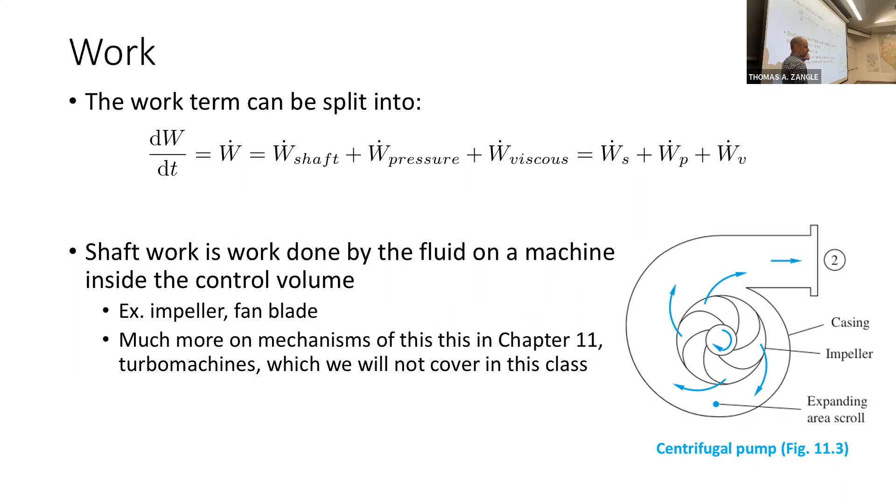We're kind of ignoring the details of exactly what its flow looks like. We're just saying what is the rate of energy change due to that piece of equipment. Makes sense? So the second term here is the pressure work term. And I really just want you to understand where this comes from.

So if you remember back to like a physics 1 type thing, work is force times velocity, right? That holds here as well. But if we had a cart that I'm moving along the floor of the lecture hall, or I take my water bottle again and I slide it along this desk, right? There's a frictional force that I'm opposing as I'm pushing it here. And if I push at a constant velocity, I am doing work against that force. And the amount of work that I'm doing is the force that I'm applying times the velocity with which it's moving, right? That's the work.

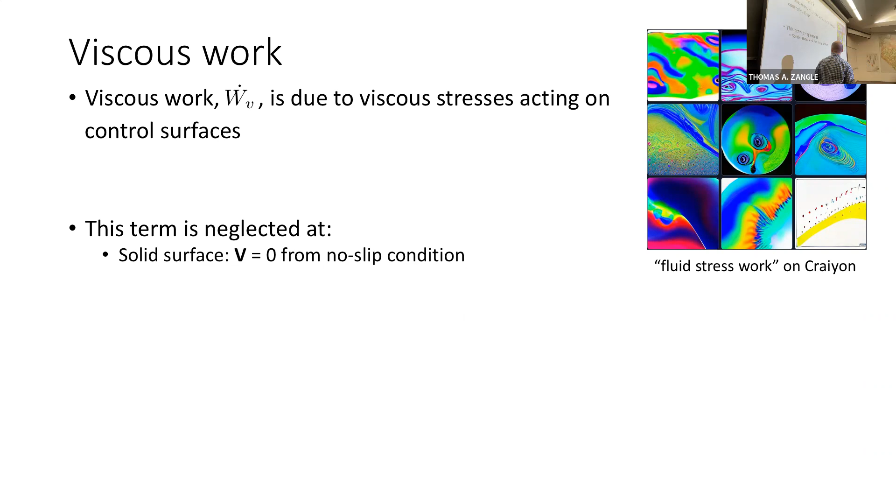So actually, at any solid surface, the velocity of the fluid is equal to the velocity of the solid surface, meaning that at the surface itself, there will be no net amount of work being done by the viscous stresses on the surface. Again, work would be like the force times velocity. And since the velocity of the fluid is equal to the velocity of the surface, the relative velocity is 0. There's no work being done by viscous stresses at the solid surface itself. So at the solid surface, V is equal to 0.

At the surface of a machine, as we mentioned, any viscous drag effects are going to be included in that shaft work term. So if we have some kind of a turbine or something that we're spinning with a fluid, we're not going to say that we have a shaft work term plus the viscous work that's being done within that piece of equipment. We're just going to say that all of that is lumped into the net shaft work term. So we're going to ignore the viscous work term there.

If we have an inlet or outlet normal to the flow, so again, this is another reason to choose your control surfaces normal to the flow, then the normal components of the viscous stress are typically negligible, and so we're not going to have any viscous work being done at inlets or outlets that are normal to the flow. So basically, the only time that this term is important is if our control volume boundaries are on streamlines within the fluid. So what I mean is that if this represents some flow within a fluid, and our control volume boundaries were entirely contained within the fluid and following along with the flow.

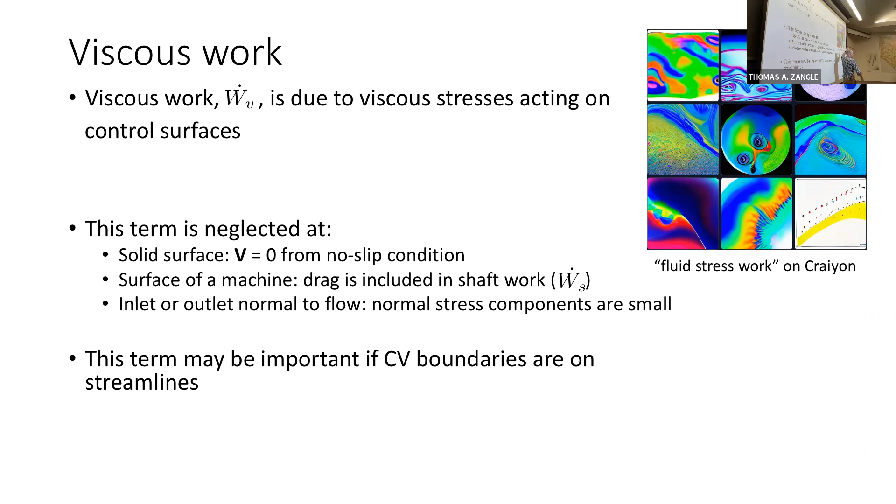Right, so not at a solid surface, not normal to an inlet or outlet, following along with the flow, then we often are going to have to include these viscous stress terms. But most of the time, if we draw our control volume correctly, we can ignore them, and we're going to assume for now they're not important in most cases.

So we will be lumping this into a viscous work term, and we're going to discuss how to calculate this later. So, for example, when we discuss pipe flow, we're going to have to include viscous work. We're going to have to include friction work. But for the most part, in our chapter 3 type problems, we're going to be generally ignoring this term, okay? Until we learn how to calculate it in our chapter on internal flows.

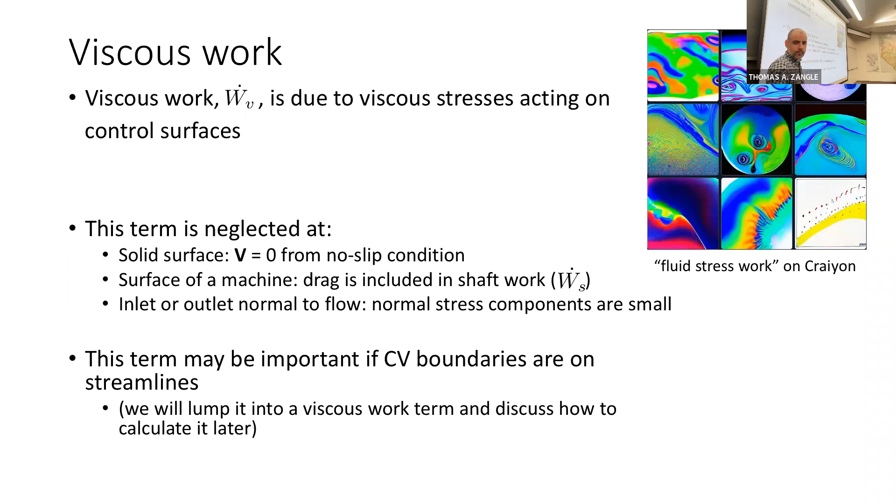All right, so if we put this all together, we're going to say that dE/dt, E dot within the fluid, is Q dot minus W dot. It's going to be comprised of those terms that we just discussed. Remember, this is equal to, based on Reynolds transport theorem, the rate of change of energy within the control volume, plus the flux through the control surfaces, which we can write out this way in terms of the unit normal, that n, right? So V dot n. So the flux across the control surface.

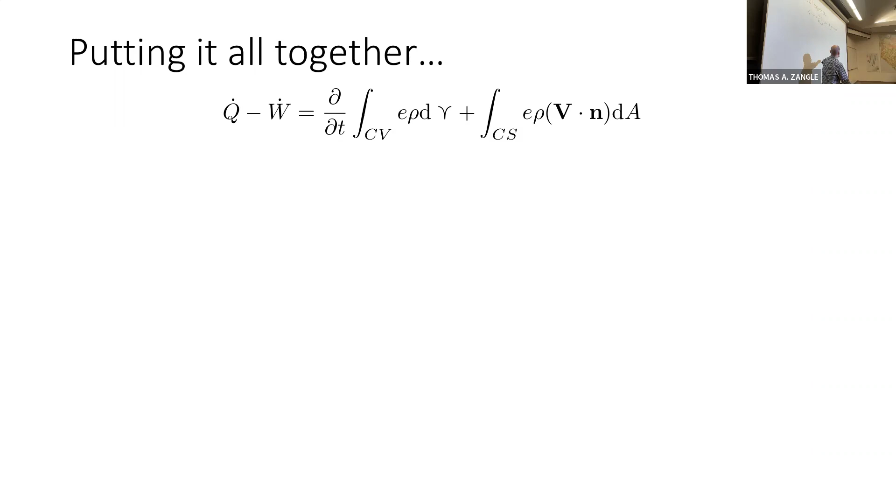And we have for the work term, we have shaft work plus, this is what the pressure work turned into, plus the viscous work. So a lot of times in chapter 3 we're going to be ignoring it, but it's going to be important when we start talking about pipe flow. And now if we plug this in,

actually before we plug this in, I'm going to take you back one step here. Before we plug this in, I want you to notice that this looks a lot like the flux through control surface term, right? What's going on inside this integral here is very similar to what's going on inside that integral up above.

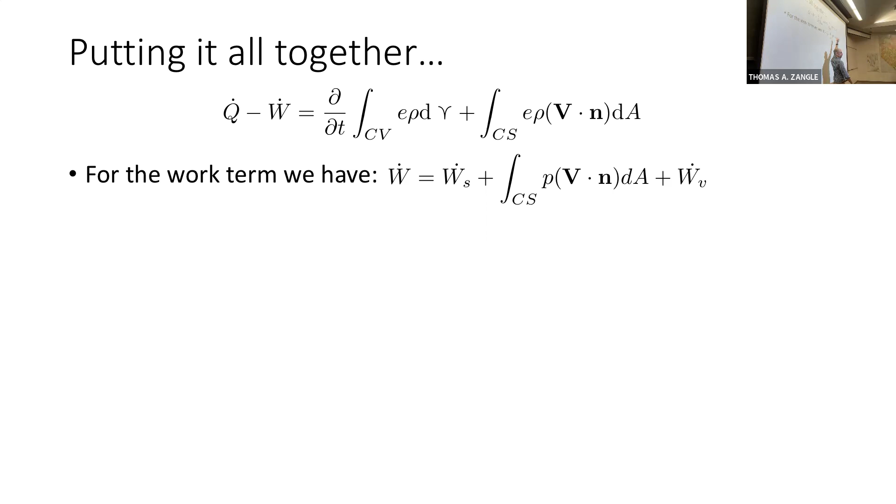So what we're going to do is we're going to take this term. That's why this is the only one of the 3 terms that we actually wrote out explicitly. So we're going to take this term and we're going to lump it in with the energy of the fluid that is moving through those control surfaces, right? Because those integrals look so similar, it's convenient to lump those things together.

And so when we do that, we end up with this form of the expression, where we have Q dot minus W dot s minus W dot v, right? So the heat flux minus the shaft work minus the viscous work, equals the rate of change of energy within the control volume, plus this integral over the control surface now of e, energy per unit mass, plus P over rho, times rho times V dot n dA. Okay. So we've lumped the pressure term in again with that energy of the fluid term. Okay.

And now we're going to expand that e term, right? Remember, we talked about energy in a fluid. We said that there's internal energy, kinetic energy, and gravitational potential energy are the 3 terms we're going to consider. And now if we remember thermo, we can write out enthalpy as our internal energy plus, in this case, P over rho. And so now we can take the internal energy part of little e combined with this P over rho and just have our enthalpy. Right, so that's why we did that work on pressure work to get to this term.

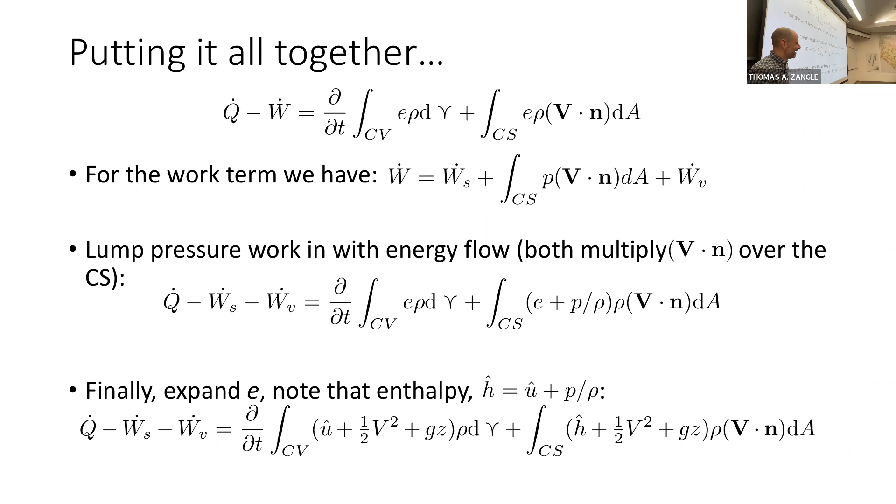Okay. So now we're gonna start. So again, our common playbook here, right? We start with Reynolds transport theorem. We derive or write out a general form of our balance equation, which is what we have here. Then next, we're going to look at simplifications, right? So the first of these is going to be for uniform or 1D inlets and outlets. So if our inlets and outlets are one-dimensional, meaning the velocity is uniform across the inlet or outlet, then this integral across the control surface simplifies pretty greatly.

We have the sum across our outflows of energy plus that pressure term within the fluid times m dot minus the sum through our inlet control surfaces of the energy within the fluid, again plus that pressure term contained in the enthalpy, times m dot. So this whole thing vastly simplifies if we have uniform velocity across our control surfaces.

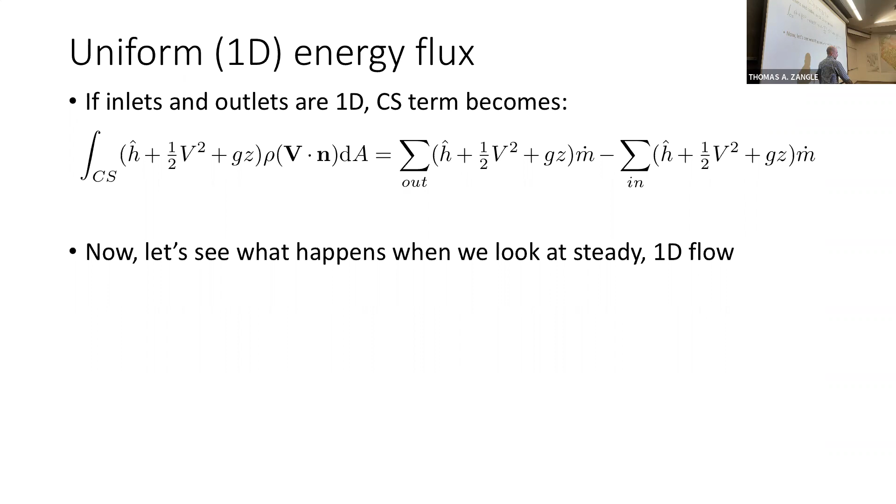And now we're going to see what happens when we look at steady one-dimensional flow, right? So if we have steady state, what does steady state imply? No change in time, d/dt equal to 0, right? So that first term on the right-hand side will typically disappear. So let's look at steady flow, one inlet, one outlet. I have some control volume here with some inlet, which I'm going to call control surface 1, and some outlet I call control surface 2. Meaning m dot 1 is m dot 2 is m dot.

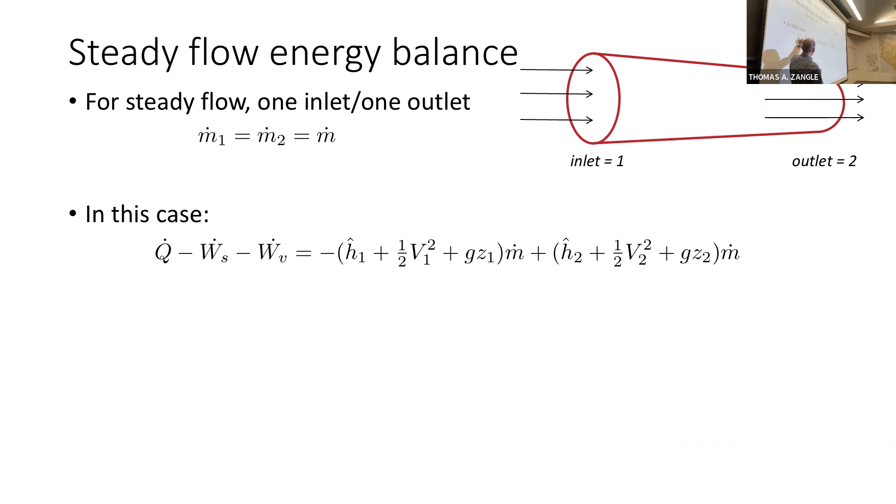So in this case, my Reynolds transport theorem boils down to this, right? So I have my heat, my work terms, my shaft work and viscous work terms, and the d/dt term has dropped out because I'm assuming it's steady. And since it's one-dimensional, I can rewrite my inlets and outlets this way.

And now, yes. So just for, is it also 1D and steady state? Right. So steady state kills that d/dt term, right? The integral over the control volume with the weird V that everyone hates has gone away, right? Yeah. One-dimensional means that my control surface integral with the V dot n that everybody hates turned into this.

Okay. So one-dimensional means one inlet and outlet. Sorry, one-dimensional means uniform. Yeah, so that's why I try to write this out as uniform, and I suppose I did here. So one-dimensional in your textbook means uniform velocity across the inlet and outlet, so you see I'm saying that the velocity is the same going all the way across that face. Okay.

So there's no velocity profile. Yeah, right. Is that only true for one in and one out? That's not only true for one in, one out. So if you remember, last class we looked at an example where we had some big control volume, and we had, I think, one outlet and two inlets.

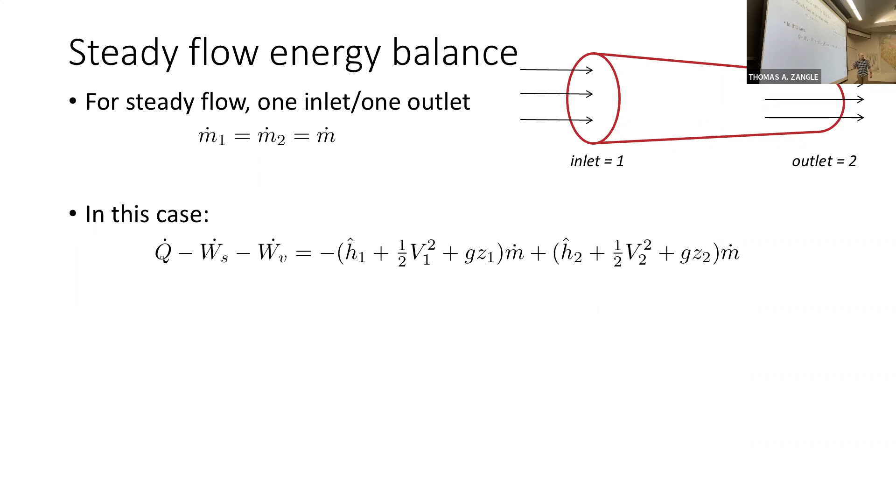So we are going to take all of our work and heat terms, and we're going to express these terms now per unit mass. And if we write these terms per unit mass and rearrange, we'll end up with this expression here. Basically, it's telling us the balance for our inflows minus outflows. So we have our energy flowing in is energy flowing out, minus the heat transfer to the fluid per unit mass, plus the work we take out from the fluid.

Yes. Why is the work now small? So the work is now small because we're taking it per unit mass, right? So like when we had big heat, in Reynolds transport theorem, we said energy per unit mass, we've done the same thing. Okay. So energy flowing in is equal to energy flowing out minus heat transferred to the fluid per unit mass plus the work done by the fluid. And so, with one inlet, one outlet, we get this much simplified form.

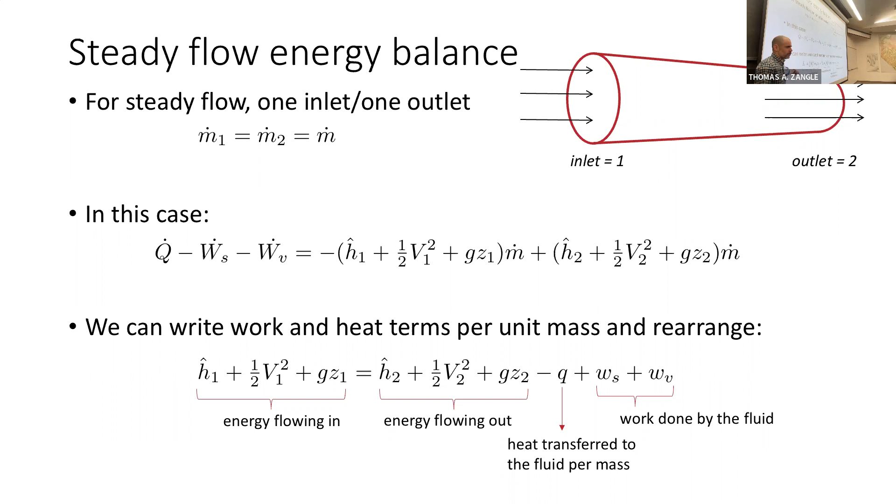We can make other simplifications, though, to this energy balance. So if we assume it's low speed, in a fluid, that implies that it is incompressible and therefore constant internal energy. And so if we have constant internal energy, those U terms, basically inlet and outlet, are going to drop out, right? We have constant internal energy within the fluid.

And so now our enthalpy, right? Remember our enthalpy was that internal energy plus P over rho. If we have the same U in and out, then those drop out, and we're just left with the pressures in and out. Now our enthalpy term resolves to P over rho on either side. So for incompressible fluid, we now have P over rho plus the kinetic energy per unit mass plus the gravitational potential energy in is equal to the same terms out, again, minus heat plus the work.

Yes. So low speed then would be relative to the fluid? Yeah, so low speed here is relative to Mach 1, relative to the speed of sound, right? So low speed means that the fluid is traveling substantially less than the speed of sound. Mach number is much less. Good question. So remember, for water, we treat water typically as incompressible. Most liquids we treat as incompressible, and gases at low speeds we also treat as incompressible.

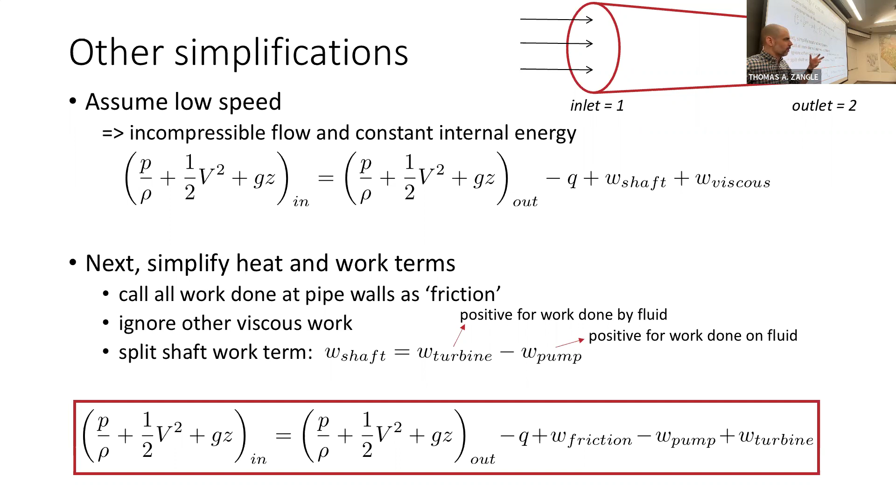Okay, so one note on one-dimensional or uniform inlets or outlets. This form of the equation is really convenient to use, because we've gotten rid of that integral over the control surface, and that whole v dot n thing went away when we assumed uniform inlets or outlets. So it would be nice if we could use a similar form of this expression for non-uniform inlets or outlets. This is where we get the kinetic energy correction factor.

So if the inlets or outlets are not uniform, it's really just the kinetic energy term where we have this v squared multiplying a v, and where our integral becomes something more complex. And so we just define this kinetic energy term integrated over the control surface as alpha times 1/2 v average squared times m dot. We can then solve for what this alpha term is. V average is the average velocity across the control surface.

Right, so if I have laminar flow through a pipe, and I have some parabolic velocity, redrawing it a little bit bigger, my average velocity is something like this. So if I can solve for what alpha is, then I can rewrite that kinetic energy term in terms of just its average velocity, and get something that's analogous to that uniform inlet system.

And so we can solve for alpha this way: 1/A times the integral of (u over v average) cubed dA. Is that u velocity? Yeah, u is the component of the velocity that is normal to the surface. What's that? It's the integral over the surface, over the area. Yeah.

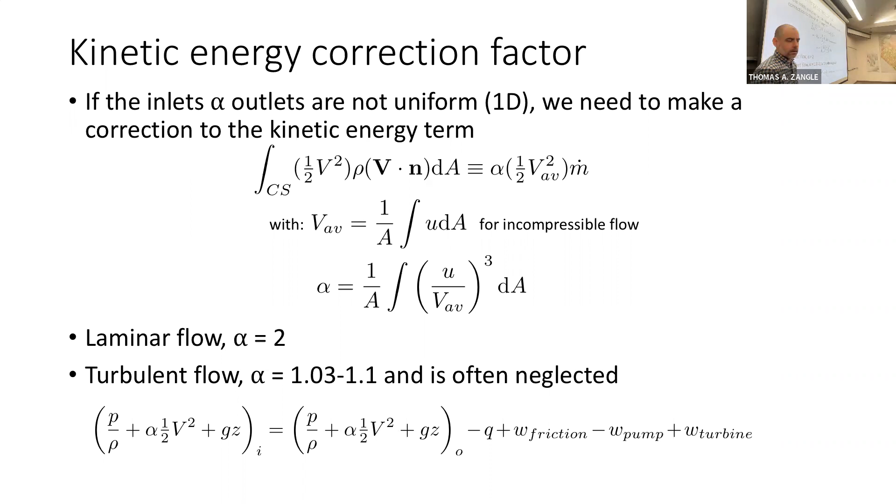So some notes on energy balance, and this is why we have that H hat. We sometimes will write this in terms of a head, which has dimensions of length. It's equivalent to the elevation of a fluid column at a given pressure. So it's like your fluid statics type thing, a way of measuring pressures. So in this case, we're writing out things in terms of this head. We're typically ignoring heat transfer. It's awkward to talk about heat transfer in terms of these units of head.

And so in that case, the form of our expression becomes this, where H is head, not enthalpy. So that's why we use that H hat, right? And so we have P over gamma, right? That's just rho g, V squared over 2g plus z on the inlet. The same thing on the outlet, plus we say the head loss due to friction, the head gain due to the pump, and the head that we take out due to the turbine.

We'll see when we're dealing with pipe flow networks, this can be a convenient way to talk about flow in pipes. This is how your textbook deals with flow in pipes, in terms of heads through pipe flow networks. And so this is the convention that we're going to follow when we get to pipe flow. Just be aware, that's where we're going. What is the head in pipe flow?

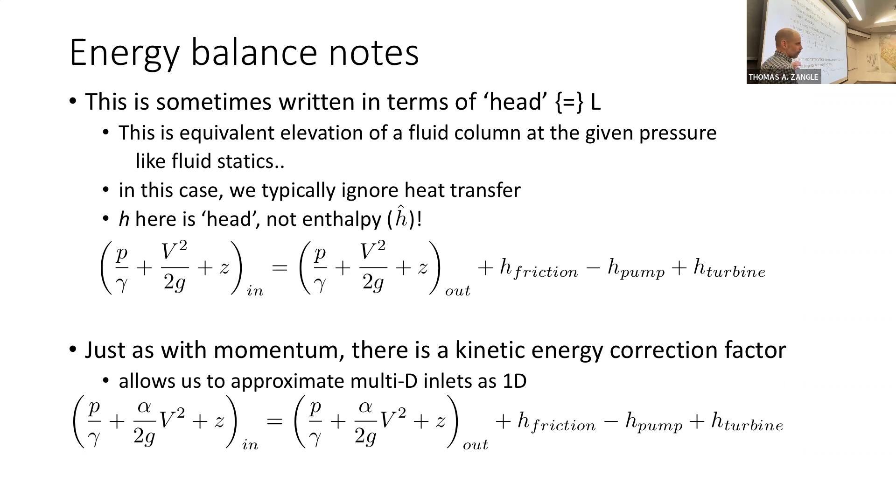Okay, and again, just a reminder, there's a kinetic energy correction factor, just as with momentum. And in the head form of the equation, that just shows up as putting an alpha here instead of a 1 in the kinetic energy term. Okay. So now we have less than 5 minutes left, and we're gonna derive the Bernoulli equation. Serious.

So we're gonna start from the one-dimensional incompressible steady-state energy balance. And we are going to say there's no heat, no work, no friction. And we end up with the Bernoulli equation. That's why we do it this way. Your textbook follows a different path. But this is the Bernoulli relation for a fluid. We're going to write it out in a slightly different form.

So first of all, the inlet P over rho plus 1/2 V squared plus gz is equal to the outlet P over rho plus 1/2 V squared plus gz, meaning that's equal to a constant for the fluid, representing basically the amount of energy within the fluid. We'll often write this out as a delta of each of these terms: P2 minus P1 over rho plus V2 squared minus V1 squared over 2 plus g times Z2 minus Z1 is equal to 0. That's just a rearrangement of this expression.

If we multiply through by rho, we would have 1/2 rho V squared plus rho gZ, the same expression. But this is the Bernoulli equation. It is sometimes described as one of the most powerful or most useful equations in fluid mechanics. And when it is applicable, it definitely can be. So I want to return to the mantis shrimp example.

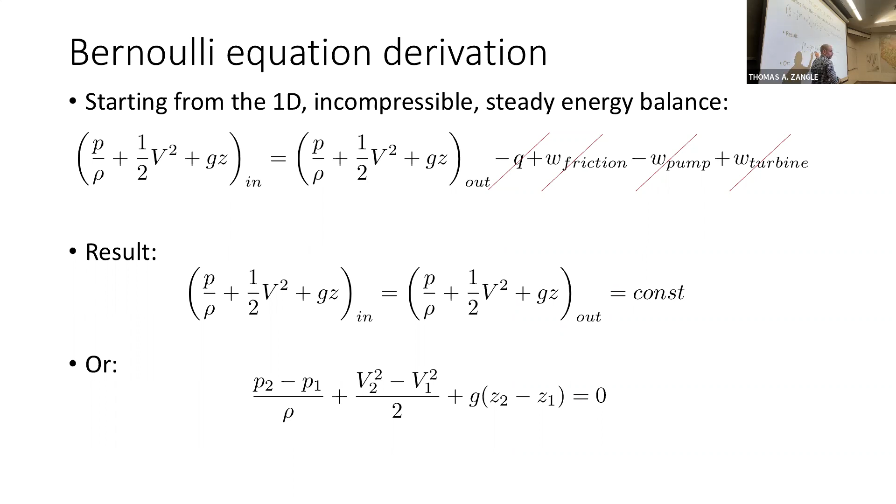And if we're not moving up or down an incline, and Z is not changing, then that comes from fluid pressure. So V goes up, P goes down. As that fluid accelerates to really high velocity, the pressure decreases so much that we get below the point where the fluid starts to boil and creates these cavitation bubbles. That's the type of thing the Bernoulli equation is great for: getting some intuition into what's going on in fluid systems.

But a note of caution, and we're going to end on this today and pick up with a last note about Bernoulli on Wednesday before chapter 4. It is incredibly widely overused, because its simplicity is kind of seductive. You want to use it when you see a fluid mechanics problem, this powerful tool, and it is often very widely overused. So we'll talk more about restrictions on the Bernoulli equation and how to use it responsibly.